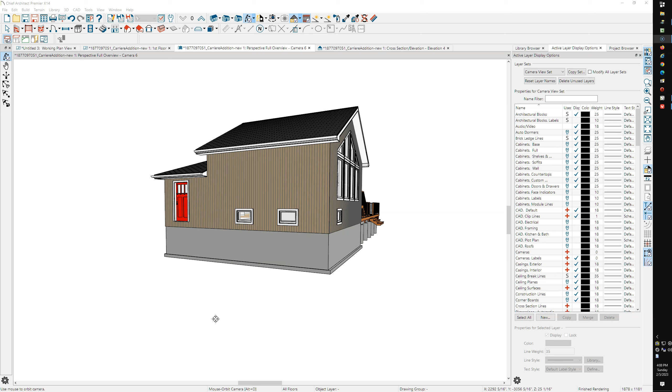You can see everything here is cleaned up. I rebuilt the foundation, and that fixed some things just by doing that.

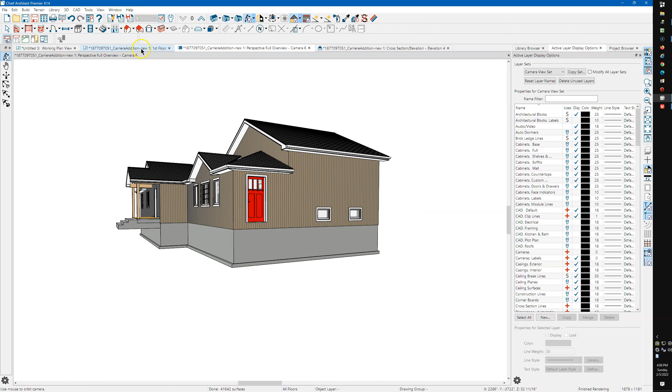But the main thing I did was I created a second floor, and I put that bedroom on the second floor. And then this space right here is open below.

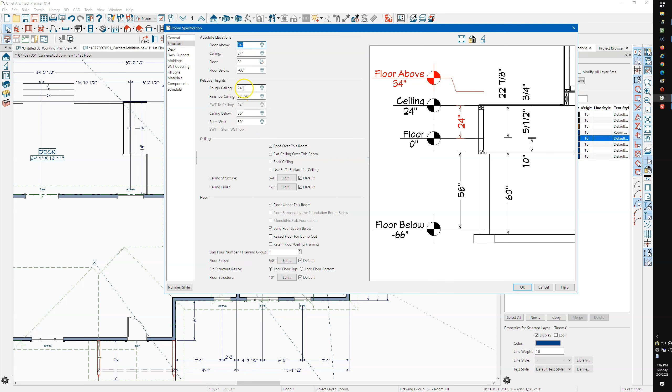So this room, I've got the rough ceiling at 24 inches. I just guessed at some of this stuff just to get it done. So this space right here is open below.

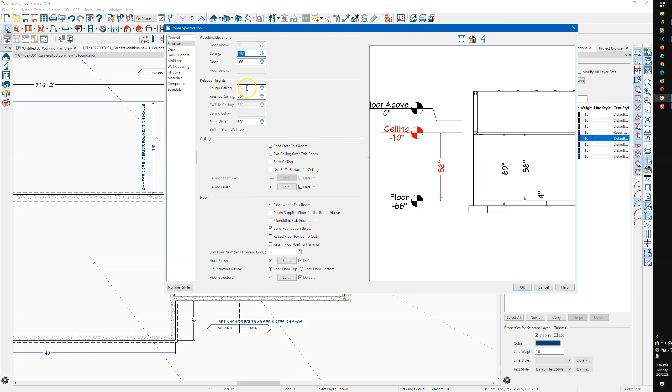And so when you go down here to the... I think I hit the walkthrough button when I was clicking up on the toolbar before. When you go down here, this is rough ceiling of 56 inches. And again, I didn't pay any attention to see if that's right.

But you can see how clean everything is. You've got a wall there, you've got a short wall there, that's where the open below room is. You got a tall wall up here, and then you've got your foundation wall that runs all the way across.

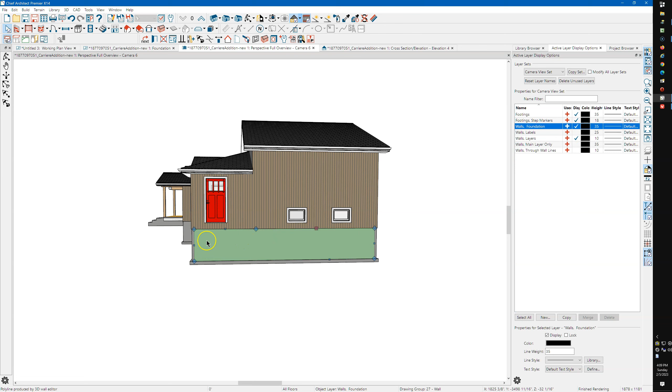And there's no lines anywhere. Now I did have to fiddle right where these two walls join right in here. I did have to fiddle a little bit with that, but the lines easily disappeared.

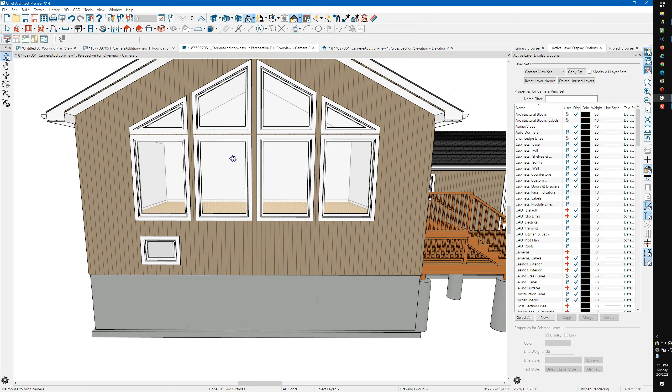And again, I just did this rough. The other thing I would do is you can see that there's this wall I've got set to balloon through. If I set it to automatic, you've got this little attic wall up here.

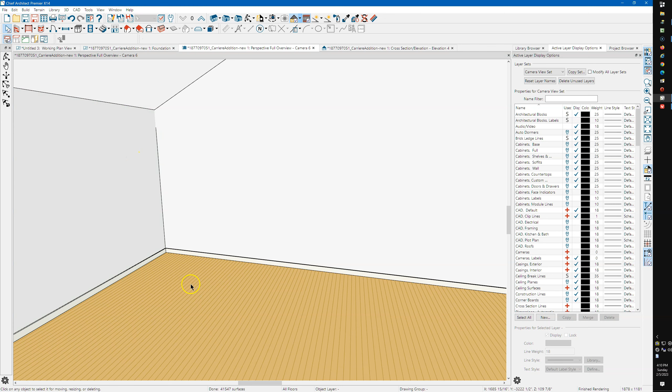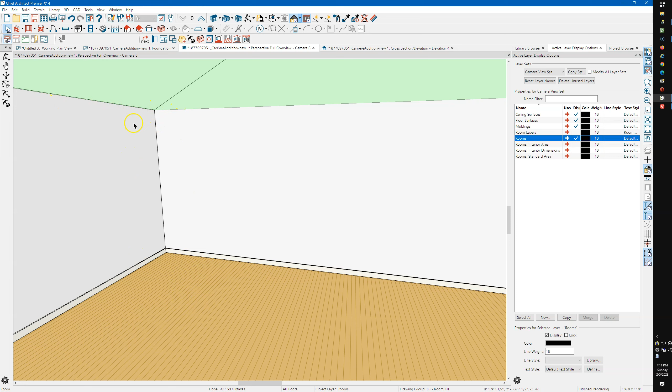And that's because your rough ceiling was the default 97 1/8, and I'm gonna add just 12 inches, and that gets the ceiling height in this room up to where the top of that wall is. The walls raise up, and you better get a better connection up here.

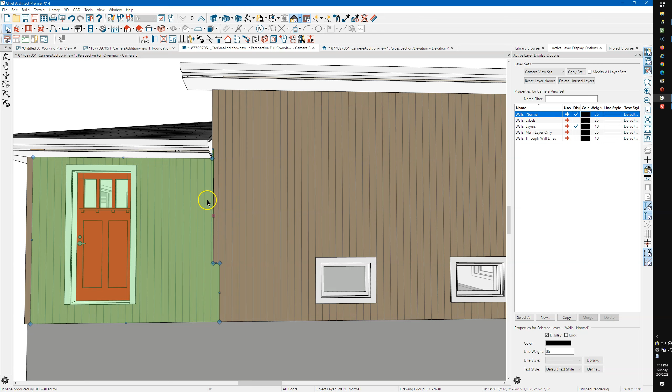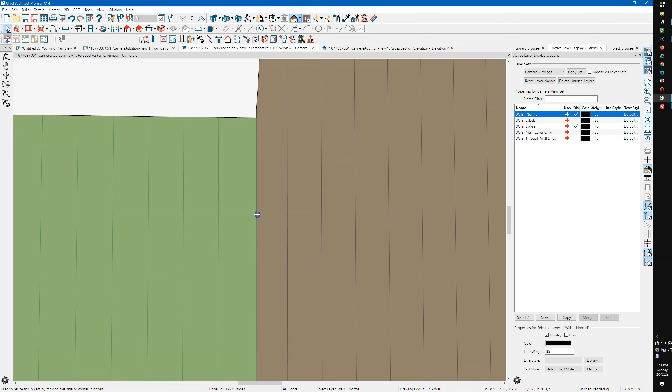I'll spin back around. Yeah, see, here's that. When I did that, you can see these two lines right here. And if you zoom in here and you just kind of carefully... well, it was easy to do a minute ago. There.

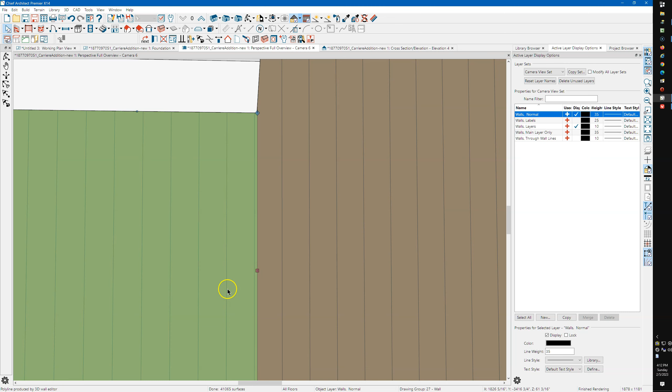I wish Chief would clean those up by itself, but it doesn't. So anyway, that's what I discovered in my...

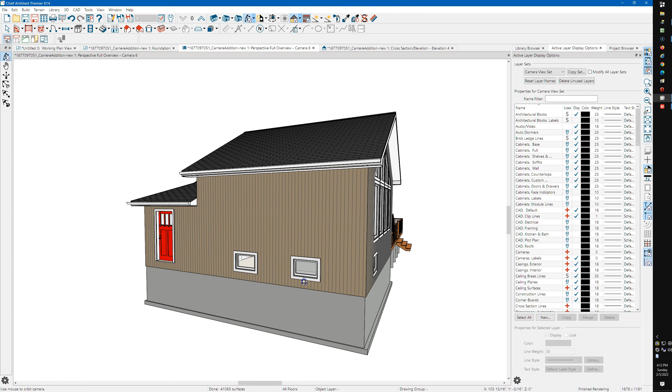experimenting with something like this, where you've got a foundation like this that's clean, where your foundation wall is the same height all the way around. What I found was that instead of doing a pony wall like you had, if you create this as an open below, a little short open below room, and let this bottom space fill in the rest.

That works. The other thing you might try is, if you do want to use the pony wall stuff, make the second floor up here, and then instead of making this area a basement, just make all this one open below room, or one first floor room, and just lower the floor down.

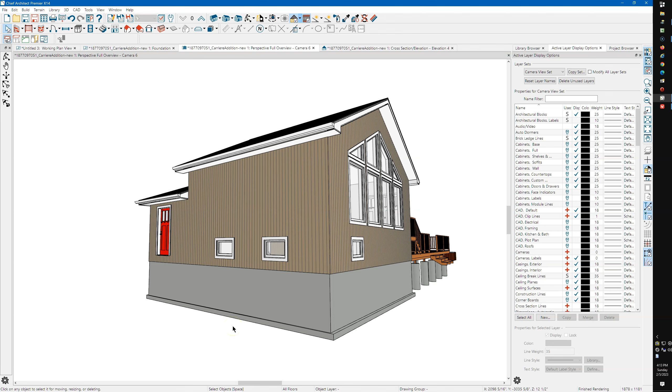Anyway, I'm sure you're aware of this, but I'll point it out anyway. This drives me nuts. This gap right here, you've got your...

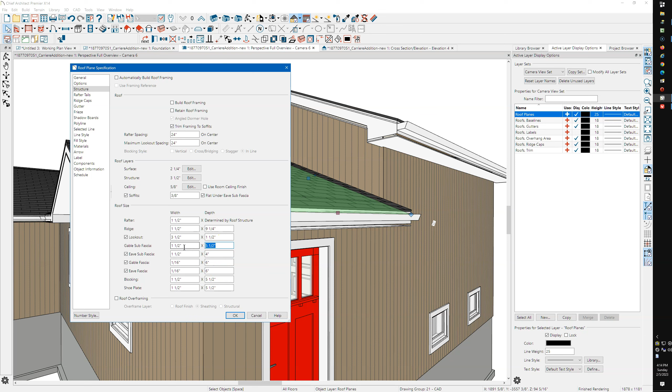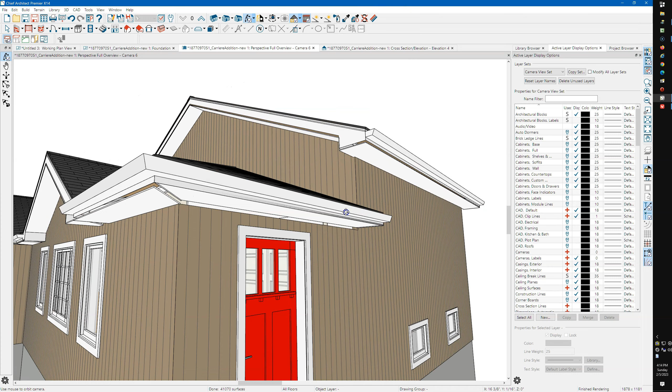I'm just going to make those a little smaller. Now that gets them up underneath the fascia. But when you raise the soffit like that,

this doesn't fill in. So anyway, the other thing that I noticed is that you had fiddled with the wall top and bottom heights. You know, it's real tempting just to, when you see a gap like this, to take this wall and just drag it up and cover that up.

And that's a bad idea, because Chief then says you're now responsible for this wall. So when it needs to do something that it would normally do automatically to this wall, it doesn't do it, because you've changed the wall. You've told Chief that you're going to manage the shape of this wall yourself.

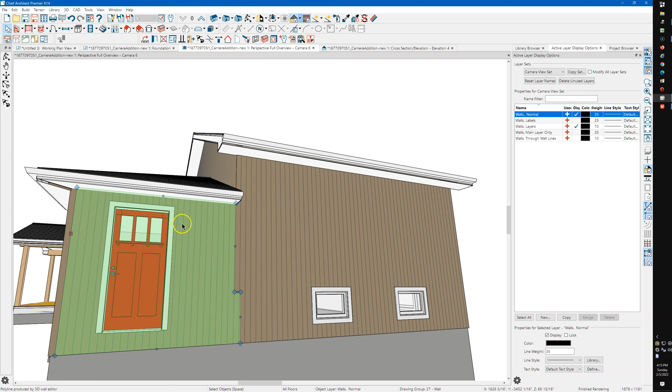And so a really easy way is you can come over here to Edit, Reset to Defaults, All Floors, and then come down here and do Wall Top Heights and Wall Bottom Heights. I'm going to cancel. And that'll clean all that stuff up.

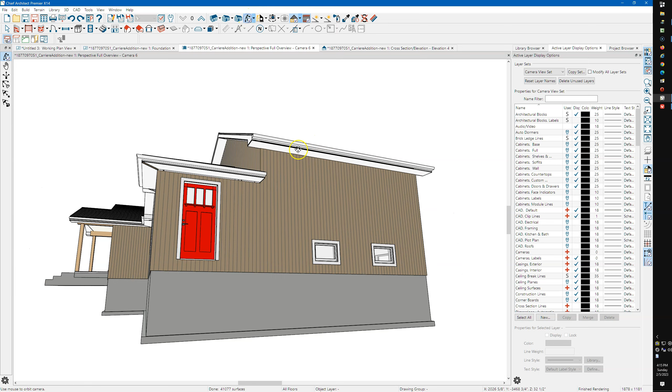The other thing I noticed is that you've got a porch here where you've drawn in your own slab. And because I rebuilt the foundation, I got this floor structure in here. And if you don't want that, just make this open below. And that'll clean that up.

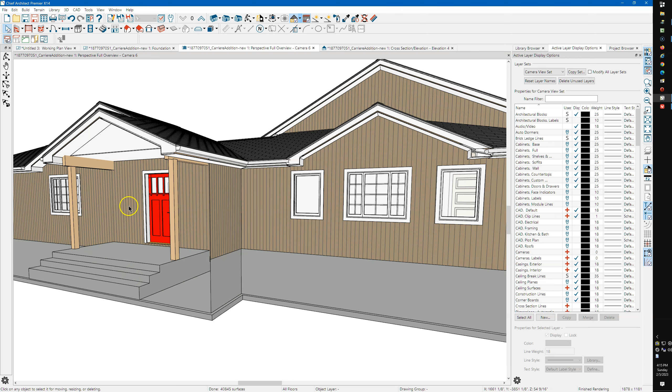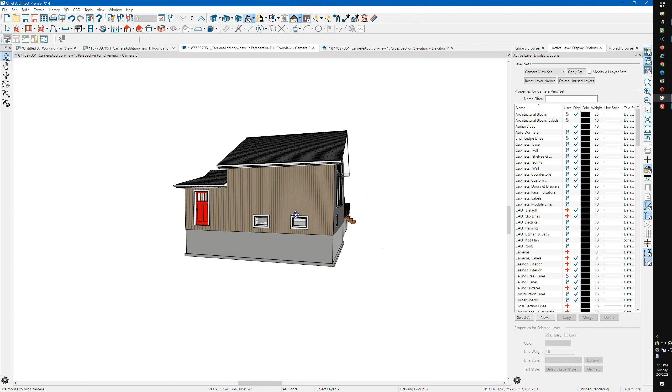Anyway, as I said, I'm certainly no expert on these. But as I said again, I have sort of experimented with them and found that this was pretty easy to do. Having a little short first floor room, and then down here the basement.

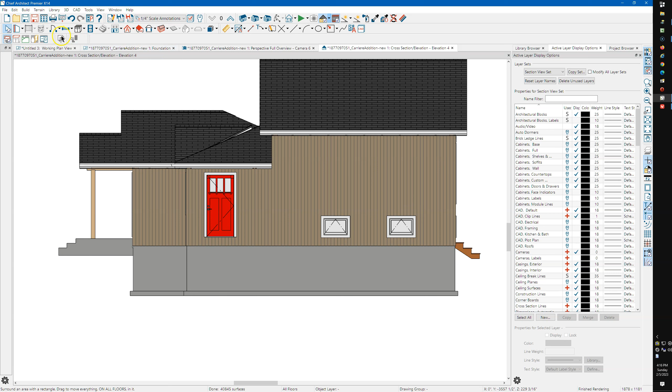The other thing you can always do, and this is a little bit of a pain, but I'm going to send this to layout. And when you've got a line in here that you don't want, you can come up here and edit layout lines. Click that button, and then you can select a line and delete it.

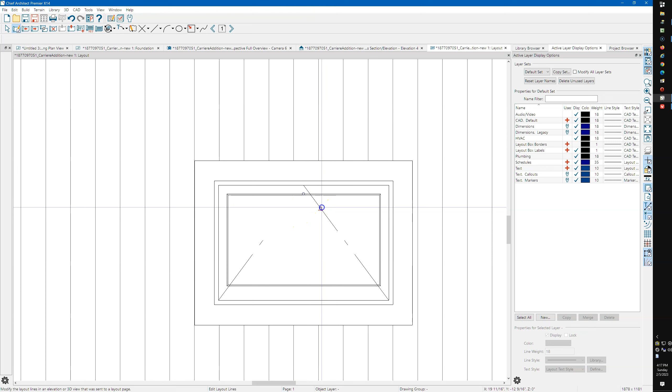So if you have some of those rogue lines in here that you don't need or don't want, that's kind of a last resort. But you can clean it up that way.